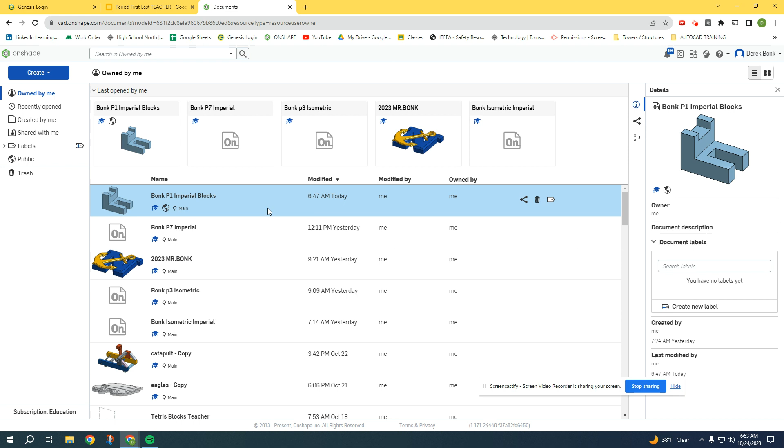This way I'm not affecting the public document. This little globe icon means I've right-clicked on this thing and made it public, which you can do to share files with one another if you're co-working on a team project—not to steal each other's work.

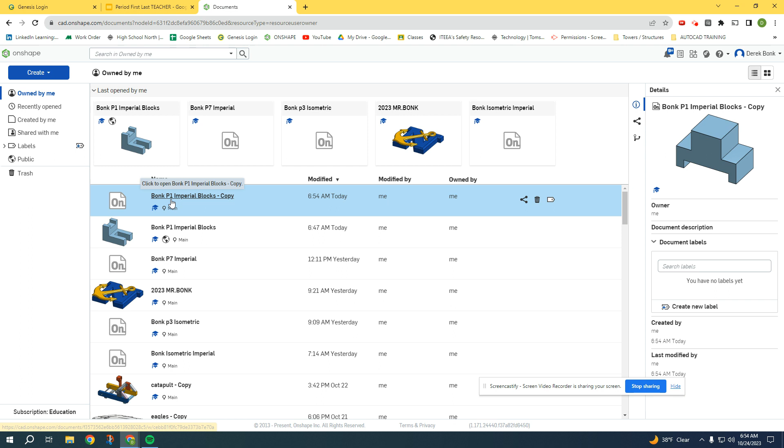Here we go. Once you've got this, I'm going to have you do your own version of each of these three blocks and the one called student. The way you're going to figure this out is by clicking through the history of my workflow here and seeing it step by step.

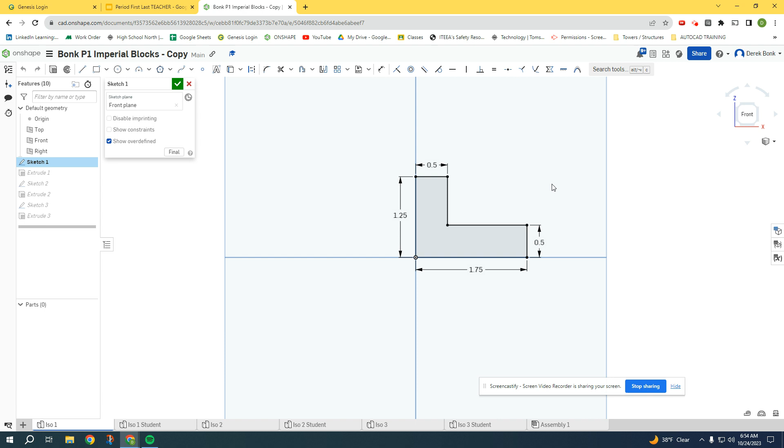You're going to learn from the drawings and measurements I put on here. This is how it's going to be drawn. You're going to draw this shape with these measurements: inch and 3/4, inch and 1/4, half an inch here, building that L shape to the exact dimensions you need.

Then when you go into the extrude menu here, you can see it's extruded to 1.25. So you're just going to go back and forth here, sketch on front plane. You'll see the measurements coming close to what you need them to be as you pull this out. The first measurement was 1.75.

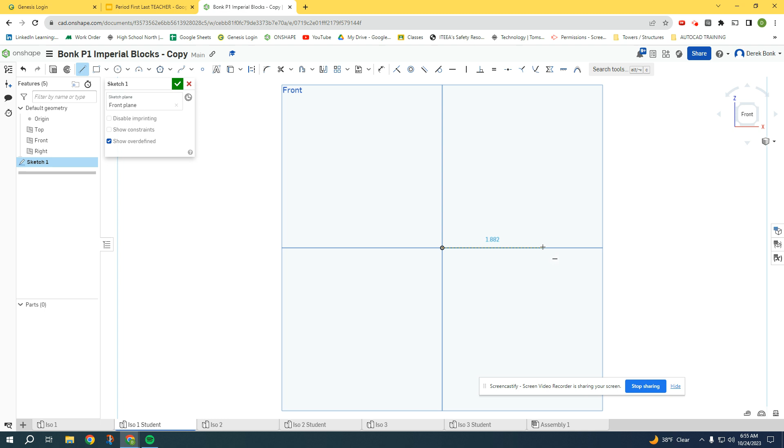As long as you're in the ballpark within 1/4 of an inch, a half an inch, whatever it is, you could just leave it be. This is going to be a half an inch. This goes up and over like so.

Then you're using the dimensioning tool here, which you can turn on with the D button on the keyboard, but you can just click this vertical line, move the mouse to the left, click one more time, type in 1.25 for an inch and 1/4.

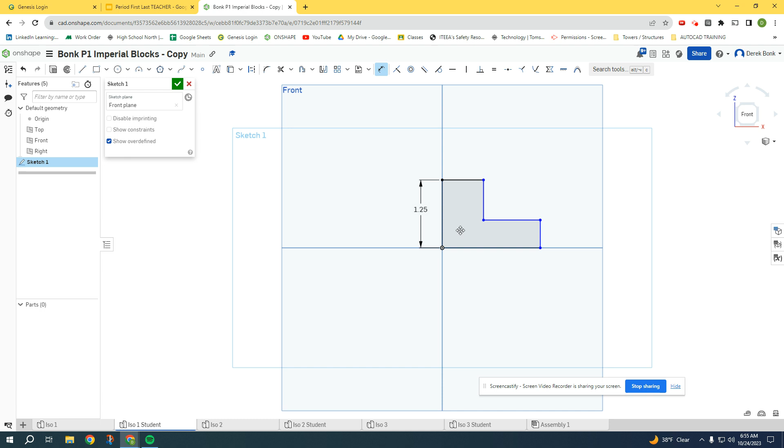On this bottom horizontal line, click again to place the measurement, type in 1.75. These lines transferring from blue to black means those lines are fully dimensioned, or locked in space with math. That's all that means, and that's a good thing.

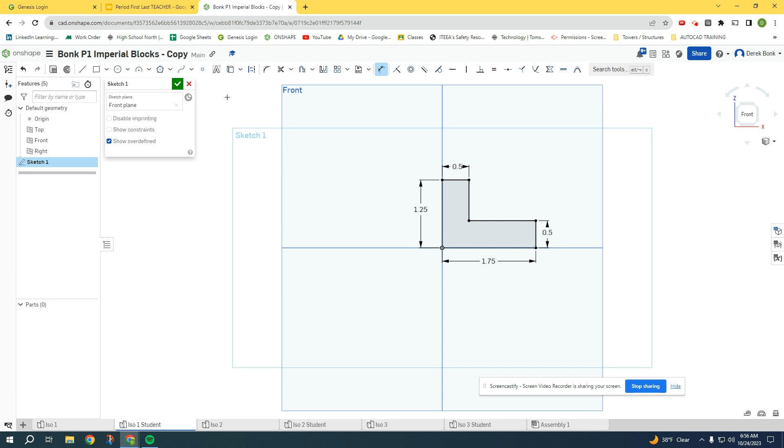So this 0.5 for a half an inch here, and 0.5 for a half an inch here. Then you're going to extrude this to 1.25 inches, or an inch and 1/4. This is dealing with just Imperial math and our fractional measurement system.

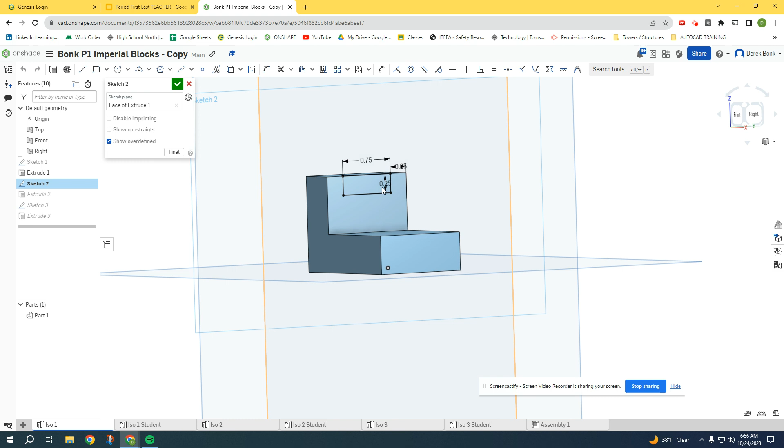All right, back to business here. Step 2 is to draw this rectangle and extrude it with remove. The extrude remove cuts through and wipes that out.

Going into sketch 2 here, you can see it's a 0.75 by 0.25 inch rectangle, which is 3/4 of an inch by 1/4 of an inch, and it's 1/4 of an inch from the right side.

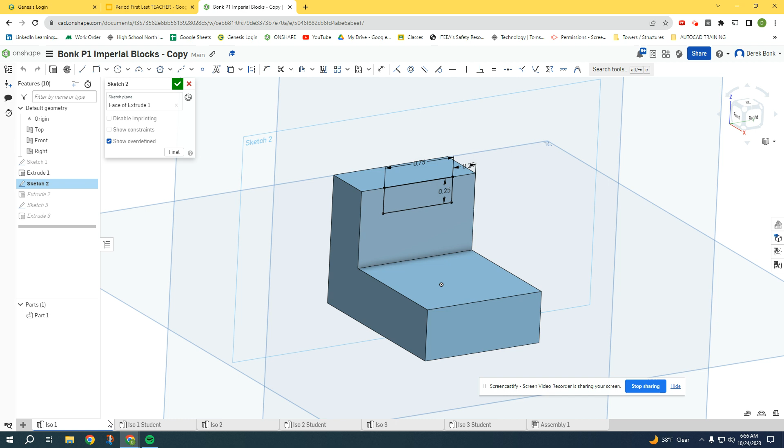So back here, you're going to sketch on the front of this block. Look at the right side here, so it makes it easy. Zoom in—you'll get an orange indicator when you're on that edge of that rectangle behind where I'm drawing now.

Pull out roughly that size. This measurement's going to pop right up. You're going to type in 0.75 for 3/4 of an inch that way. When you hit enter on a rectangle, the measurements pop up automatically. You can just hit enter and then punch in 0.25.

Your last move here is going to be pushing it off of one of the edges. So you can go from the edge of the rectangle to the edge of the block, and that's got to be 1/4 of an inch, or 0.25.

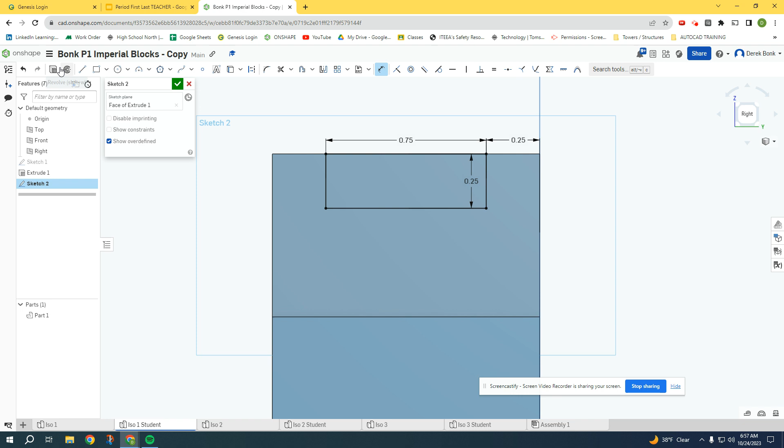What you do is extrude, hit the remove control, and that 1 inch is going to be enough to go through that half inch of material. But you can go either blind or through all in a case like this, and it's just going to go through whatever is there.

Okay, then back to the block for sketch 3.

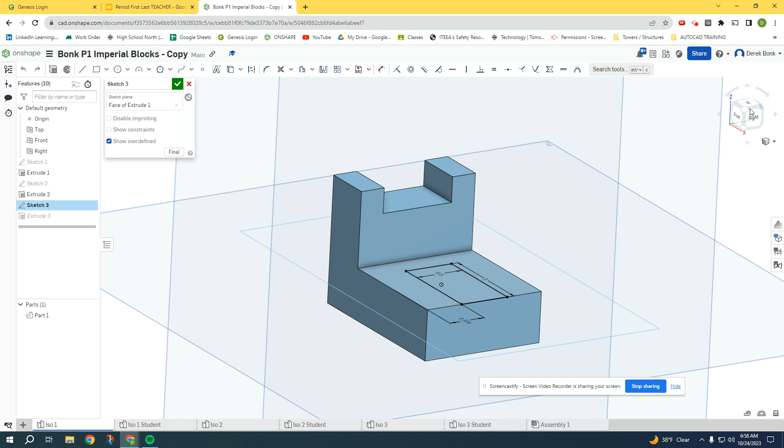Rebecca Lambert, please come to the guidance office.

It's an inch long, a half inch wide, and 0.375 off of the edge. So here is that step: click on here, sketch, click on the top of the block, draw a rectangle.

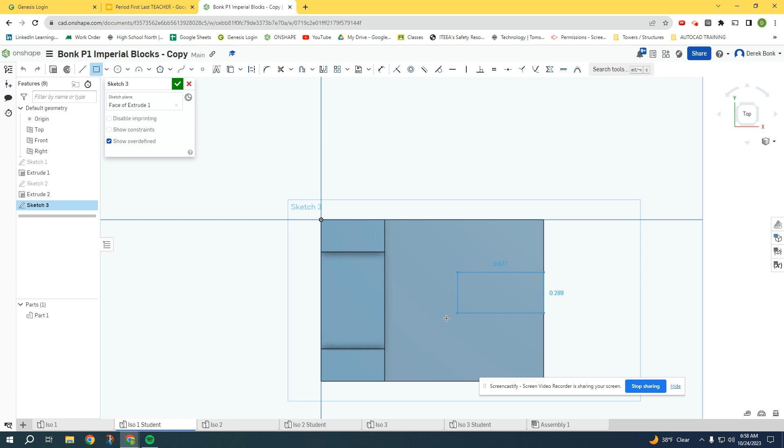The measurements are 1 inch long by half an inch, 0.5 wide, and the actual dimension on a ruler would be 5/8 of an inch, which is just something I want you to see. You could actually type in the fractional measurement if you know it—you can type in 5/8.

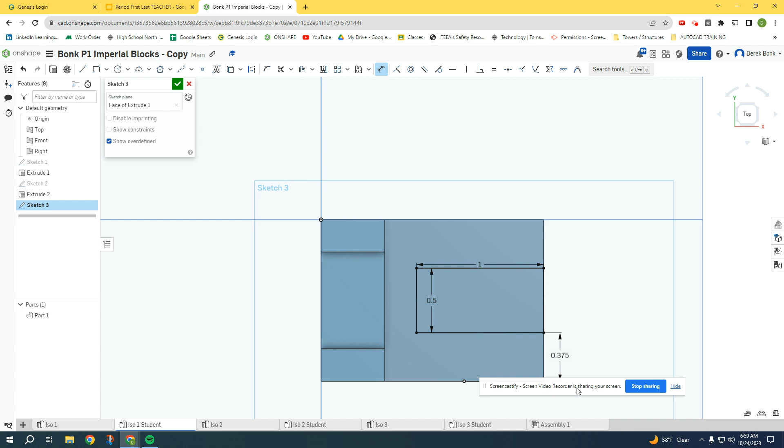I'm sorry, it was 3/8, not 5/8—0.375 inches. It's funky math, but that's why I'm doing this, so you guys can see those dimensions and I can give them to you easily.

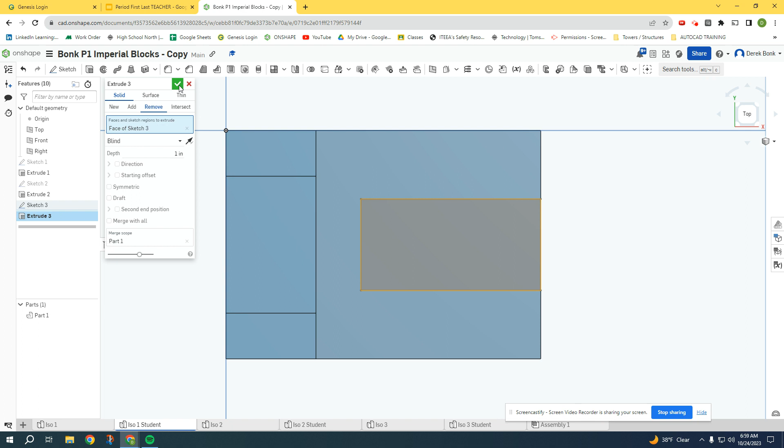The last step there was just an extrude remove again to blow through that L shape. So back here, you're just going extrude, click on that shape, hit remove, green check, and that is done.

This is an isometric view. It's just a standard engineering visibility view, that's normal standard. So you'll just duplicate each of these by again processing through this, looking at each one of my sketches.

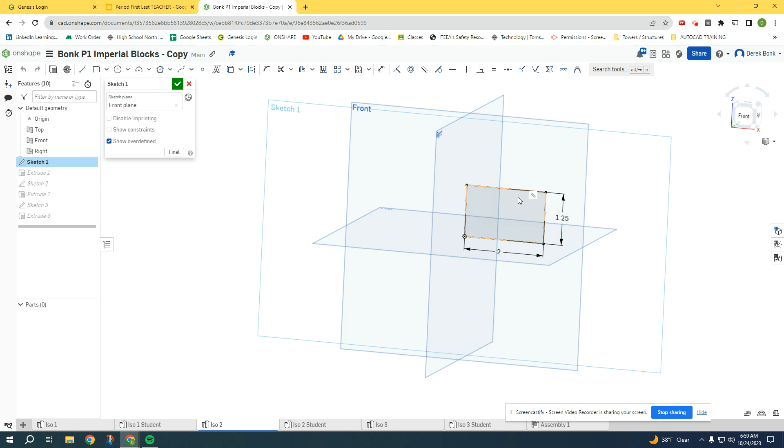I started this one actually—this is a subtractive protocol that I used with this one. What I did was I drew the entirety of the block, did a full extrude like that, and then removed parts that I wanted to make go away.

So look at these measurements and see exactly how I stepped through it. I'll put a video together for this one next, but I'm going to end this one here so you guys don't have such an overwhelming amount of controls.

So just do me a favor and don't forget, at this point, to change your name—make sure that it's your name and not my name. Change the period in this window here, and then also share it with me.